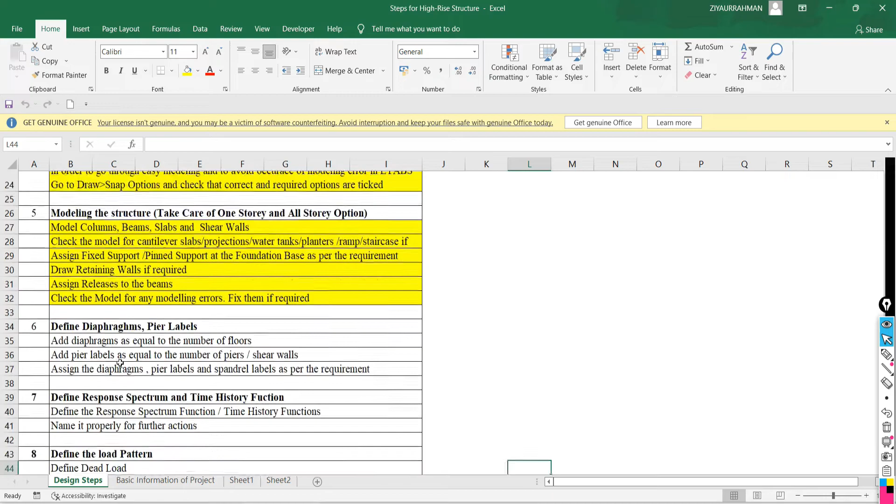So actually, all the things for the modeling of this structure we have completed. Now the next thing, we have completed the reading of all structural and architectural drawings, deciding the positions of your vertical elements, and setting up all the basic things in your ETABS software, like plan definition, story height definition, definition of material property, definition of sections, modeling of the column, modeling of the beam, modeling of shear wall.

Everything we have completed. Now the next thing we have to define: diaphragm, and we have to define the pier labels. So later on, all the discussion will be in respect of assigning earthquake load, and all the terms used in earthquake loading and earthquake consideration.

Whatever the later discussion will be, it is all associated with earthquake engineering and earthquake loading. So to understand all these things, it is very important to first clear all the basic concepts in respect of calculating the earthquake load. So let me take a simple example, so that through that example you can understand so many things about earthquake loading and earthquake load calculation.

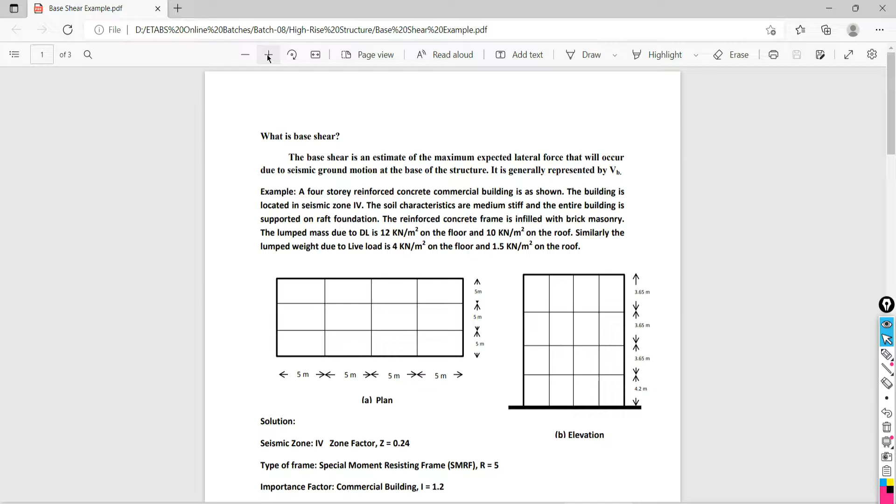So let me show you. Is it visible? So I'm going to stop the discussion for the completion of this project. In between, I'm going to take this example.

We have to understand so many things that we are going to use for the earthquake loading in the ETABS software also.

So the very first thing, what does base shear mean? That we need to understand. What does earthquake loading mean? That you need to understand. What does seismic event mean? That you need to understand.

Without having the basic knowledge, if you are going to learn advanced things, that is not the way of learning. Am I right?

Hello, Akhilesh sir. Yes, very true, yes yes. You need to start from the fundamentals.

Ryan, can you tell me what does base shear mean? No idea. That's a problem.

If you are going to learn anywhere, what will they tell you? Like, go to assign and do these things, and then your earthquake will be assigned. So that is not the way.

Digambar, tell me, what is base shear? Base shear is, sir, the maximum expected lateral force on the base of the structure. Exactly, very good.

That's the thing. That is why I'm asking this question, because it is very important to understand. Without having the knowledge and understanding of all these basic things, if you are going to look at advanced things, there will be no use of that learning. Got it? So first understand what earthquake means and what base shear value means.

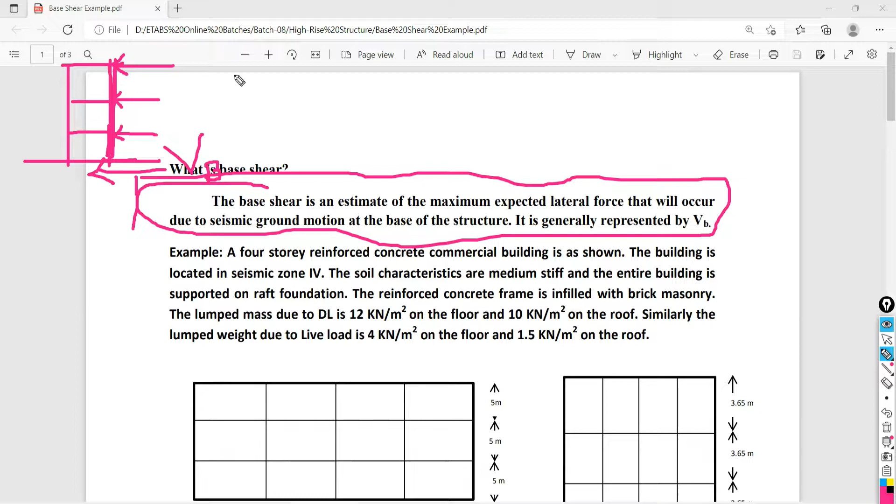This base shear value is going to be distributed over your height of structure at different floor levels. So basically, while making the calculation, later we will do this. Let me show you here - the distribution of force we are going to calculate at different floor levels.

At this different floor level, we are not going to calculate this lateral force separately. Actually the base shear value is here, and this distribution we are going to calculate only at the floor level. But your lateral distribution will not only be at this floor level, it may also be present at the intermediate level - at various intermediate points.

But my question is - why are we going to calculate this lateral force only at the floor level? Tell me.

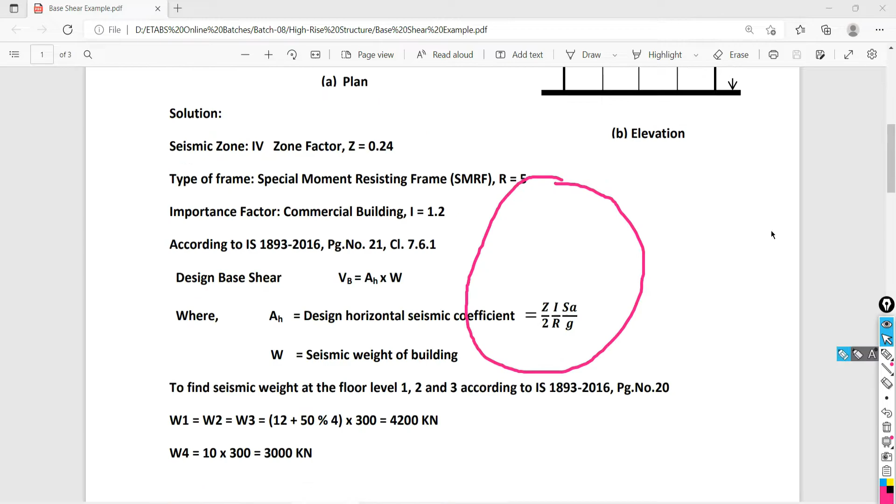One more thing - in the example we have, here we have to calculate the base shear value and its distribution over the height of your structure. So that's what we have done in this example - calculated the base shear value and its distribution over the different floor levels, and that is actually the practice.

But my question is why are we not calculating loads or forces at the intermediate level? It will also be present here, here, here, and here. So why are we calculating only at the floor level? Question.

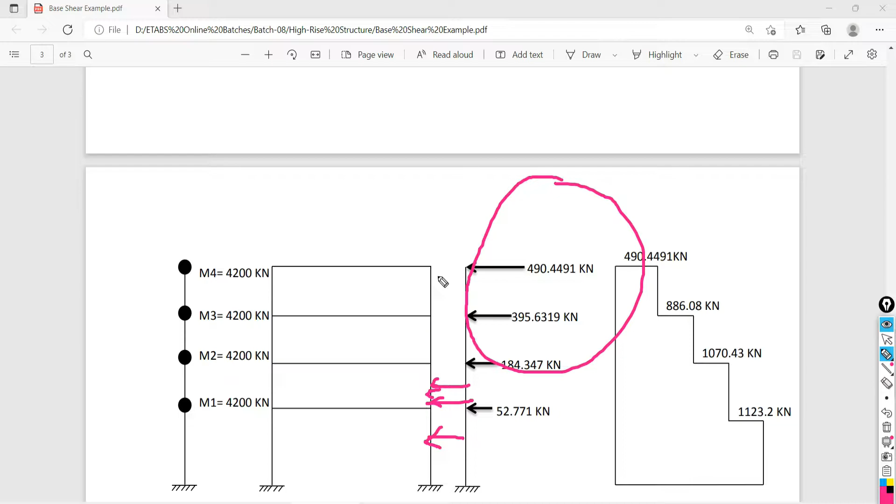Yes, because mass is concentrated at the floor levels.

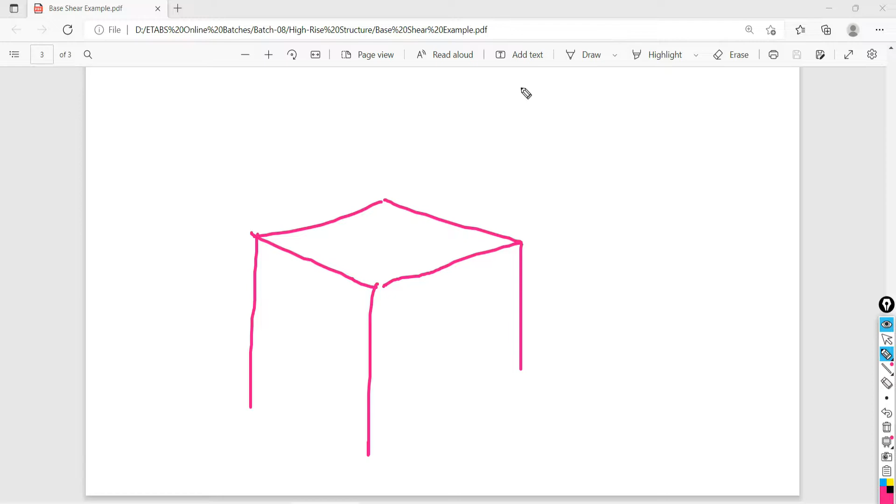Suppose any building is there like this. Those who are not getting it - okay, okay. So this is your structure.

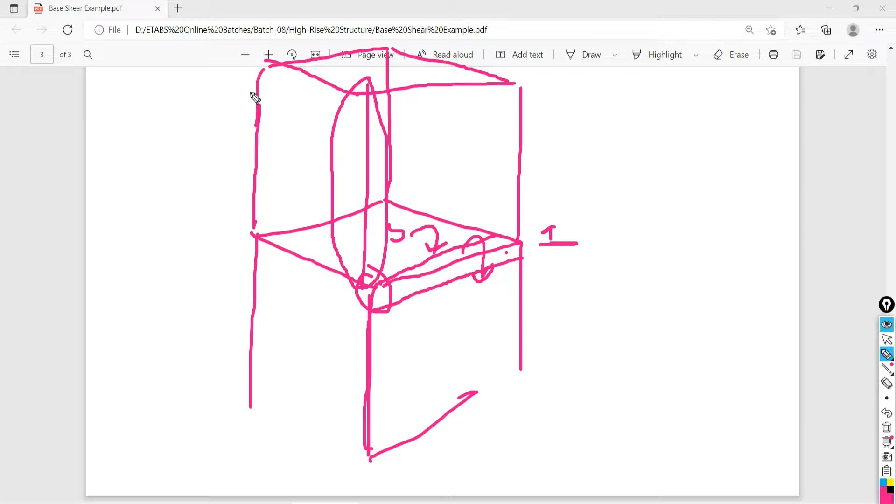So the beam will be at this floor level, slab will be at this floor level, the weight of the dead load or the weight of this column is going to be concentrated at this point. This column load is going to be concentrated at this level. So at this level the slab load, the weight of the beam, and the column load are all going to be concentrated from this level. So overall, at any particular floor, the maximum load is going to be concentrated through that floor. That's why the masses at different floors are very large - the weight of the total particular floor is going to be concentrated through that floor.

If I consider here, at this point only this column load is going to be concentrated, and that will be very minor, not needed to consider. That's why we are calculating the distribution of base shear only at different floor levels.

Second thing, at any particular point the lateral force or shear value will be directly proportional to acceleration, which is constant, multiplied by the seismic weight of that particular floor level. That's why we are calculating the distribution of lateral forces over the height of the structure only at the particular floor level.

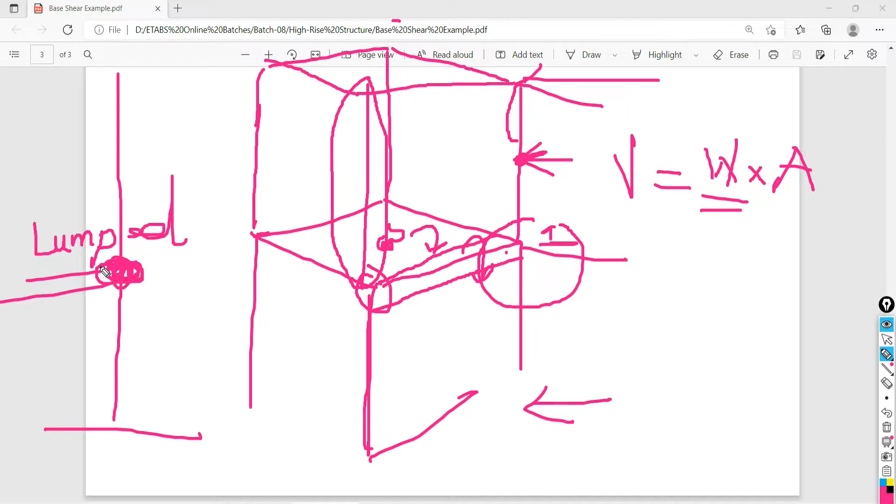And these masses - the mass of your slab, mass of your beam, mass of your column, and applied loads - all combined at any particular floor, we are going to call it lumped mass. Lumped masses.

So if you are going to deal with any problem manually, at any particular floor you have to calculate the lumped masses. That combines your dead load of that particular floor plus all the assigned load of that floor, giving you the total seismic weight of that floor. So the lumped mass at this floor, this floor, and this floor - with respect to these lumped masses, we are calculating the distribution of lateral forces.

Right, so in this example, actually all these things were done by the software also.

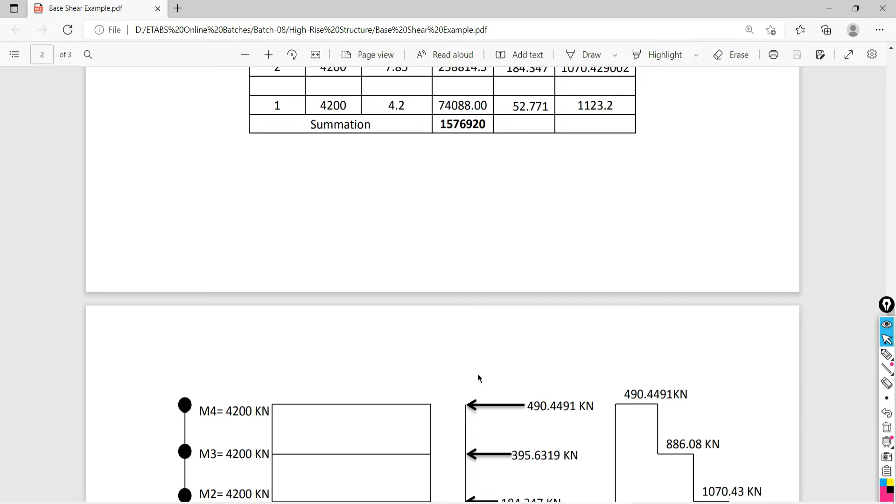So this is actually the thing, lateral forces we have to calculate. In this example we have to calculate the base shear value and its distribution over the height. That is only the question, but along with this we have to learn so many terms.

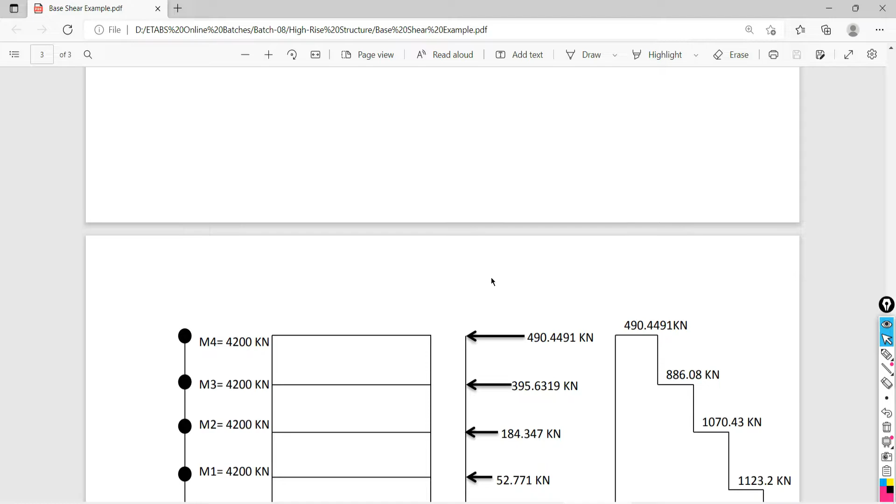Okay, so come back, very interesting. A 4-story reinforced concrete commercial building is there. What type of building is there? It is commercial, reinforced concrete. Based on utility - commercial, sir.

Forget our project that we are dealing with, forget that. The building is located in a seismic zone. Of course, our India is divided into 4 seismic zones based on the past data, meaning based on the intensity and magnitude of earthquake or seismic events of different cities and regions. Entire India is divided into 4 zones: zone 2, zone 3, zone 4, and zone 5.

Remember, it is starting from second, not first. So second, third, fourth, and fifth - four zones are there. So if you are in zone 2, there is a possibility of less intensity and magnitude of seismic event.

So here there are 4 seismic zones. Let me show you - seismic zone 3, seismic zone 2, seismic zone 4, and seismic zone 5. So Bhuj, and also the part of Latur, I think.

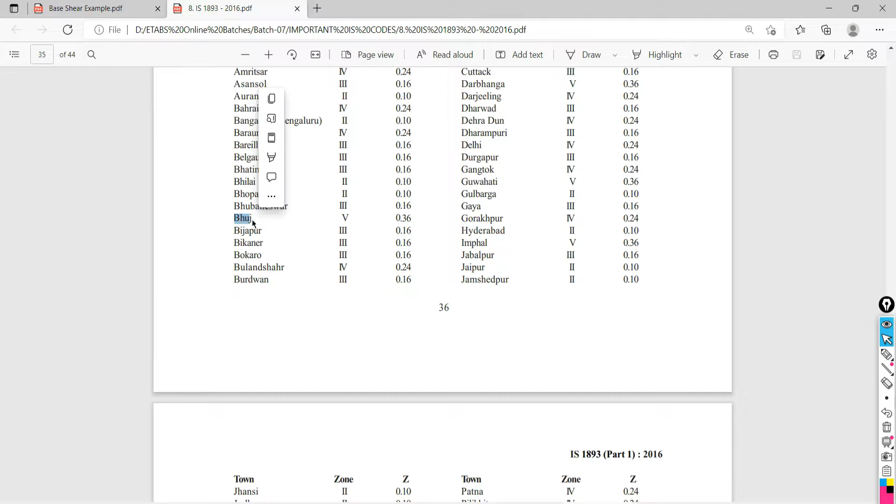Before that, if you look at IS 1893:2002, this was... I think it was in zone 3, 2 or 3 it was.

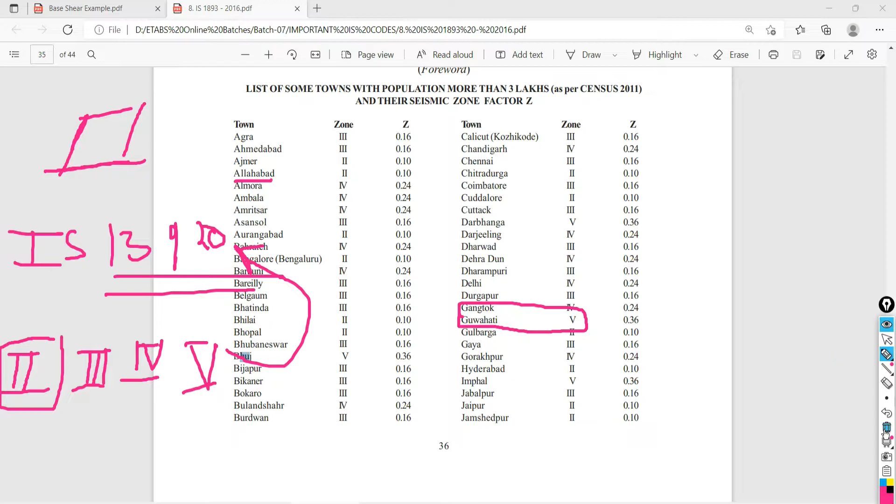That will be possible or not? Possible sir. Okay, so that's why, after the occurrence - okay, it is totally unpredictable. Seismic event is totally unpredictable, remember this thing. So one thing we learn from here is that your entire country is divided into four zones: seismic zones 2, 3, 4, and 5.

So your type of building is commercial building, reinforced concrete building. The building is located in seismic zone 4. The soil characteristics are medium stiff, and the entire building is supported on raft foundation. So as per IS 1893-2016, the type of soil is of three types: one is very stiff, then medium stiff, and loose soil or clay soil.

Okay, so I will let you know later. The entire building is supported on the raft foundation. The reinforced concrete frame is infilled with brick masonry, and the lumped masses due to dead load is 12 kilonewton per meter square on the floor level. What is it saying - it is G plus what?

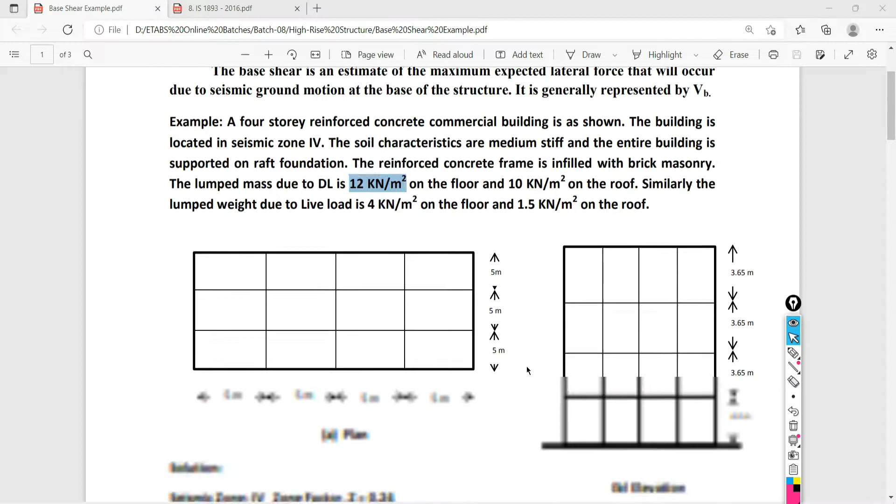G plus three floors - ground, first, second, and third - or totally if you are counting the floors, 1, 2, 3, 4 levels are there. So lumped masses due to dead load - due to dead load means what - 12 kilonewton on the floor level: 12 here, 12 here, and 12 here. Lumped masses due to dead load on the floor level, and 10 kilonewton on the roof level. Is it right or wrong?

Right, similarly roof is less. The lumped weight due to live load is 4 kilonewton on the floor level: here 4, here 4, and here 1.5. Getting or not? Getting, okay.

Remember this, now come down. So this is all the given data. Just come down - solution. The in-plan definition of this structure is: four bays along x direction 1, 2, 3, 4, and along y direction 3 bays, 1, 2, 3. Dimensions - distance between one bay is 5 meter in x and in y direction. Over the height, first slab is at a height of 4.2 meter, and 3.65, 3.65, 3.65 typical height is there.

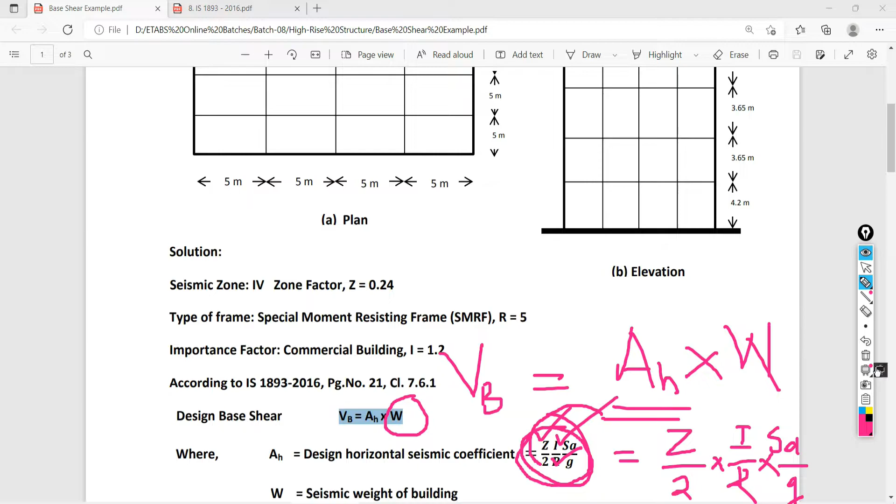Zone factor, what is it? Seismic zone is 4. What will the zone factor be? IS 1893 will tell you the zone factor value for seismic zone 4. Tell me, what is the value for seismic zone 4? 0.24, sir.

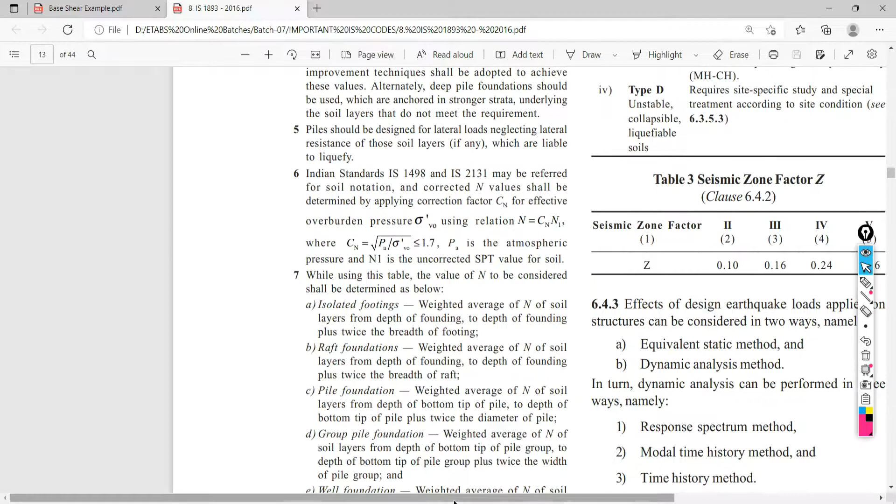0.24. Those who are doing their master's degree and want to work as a structural engineer, who are going to face interviews, they have to remember this: what are the different zones, how many zones there are, and their respective zone factor values. In the second zone the value is 0.1, in the third zone 0.16, in the fourth zone 0.24, and in the fifth zone the value will be 0.36. So that's what I'm going to put here. Zone factor value will be 0.24.

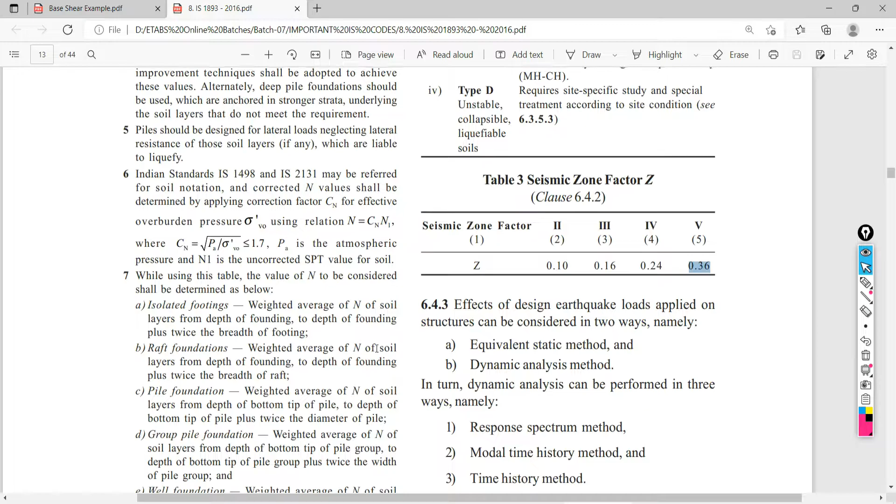Type of frame: there are two types of frames as suggested by the code. One is ordinary moment resisting frame. Another one is special moment resisting frame. What are those? Ordinary moment resisting frame and special moment resisting frame. So what is the difference between these two things?

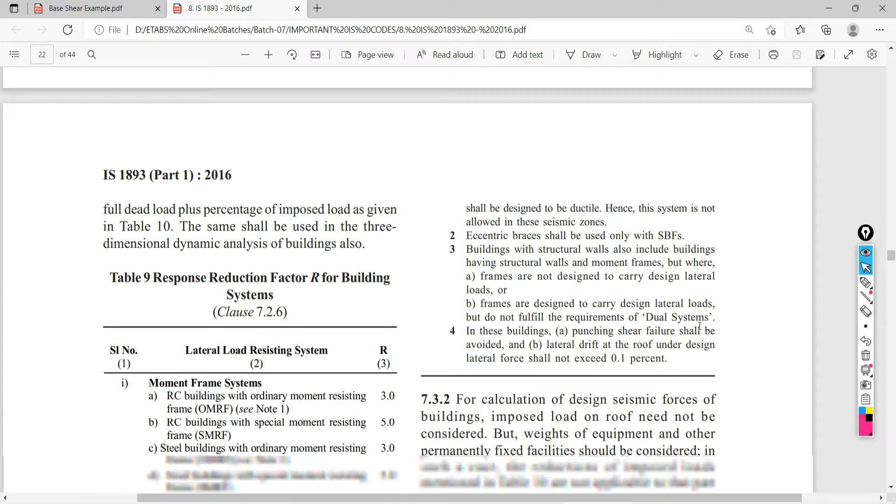Ordinary moment resisting frame and special moment resisting frame - very simple. If we are going to follow the ductile detailing as per IS 13920, at that time the building will be called a special moment resisting frame. If we are going to follow IS 13920, which is the code for ductile detailing, for your structure, then that structure is going to become a special moment resisting frame.

If you are not going to follow the ductile detailing, but you are going to consider earthquake loading, so it is going to become ordinary moment resisting frame. Is that all clear or not? Clear.

What about steel frames? There are steel frame buildings, ordinary and special, and braced frame system also there. Steel OBF structure - there is a different consideration for the steel structure. This is only about your RCC structure.

So my another question is: response reduction value we have to consider 3 for ordinary moment resisting frame, and for special moment resisting frame we are considering 5. So look at what will be the effect on your VB value, the base shear value.

Second, yes, anyone else? The probability is less.

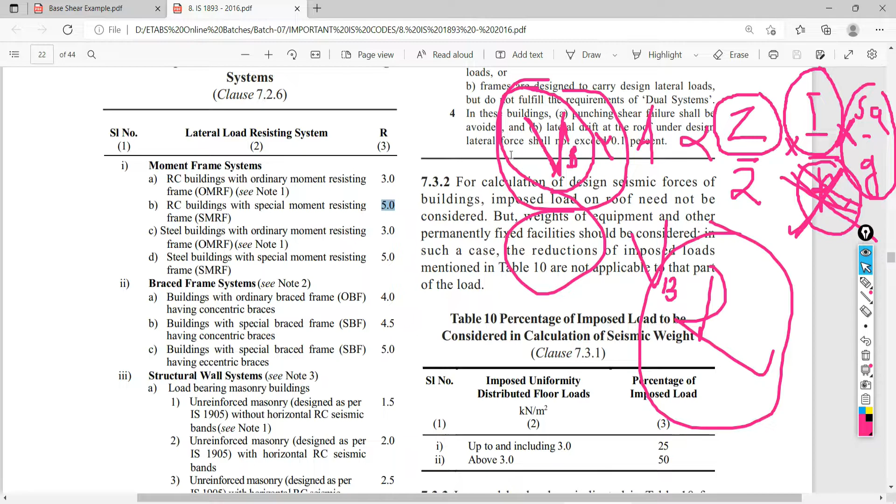Earthquake resistant design - we are going to make your structure earthquake resistant. If I remove this R value from the formula, the title of this code will change. It will become the criteria for earthquake proof design of your structure. Right, earthquake proof design of your structure.

So what does this mean? Here we are going to allow some kind of failure in your structure. We are not going to make our structure completely earthquake proof. So what will happen? We are making some provision for resisting the seismic event, but it will not become earthquake proof.

So there are three conditions. In the first case, when your structure is subjected to very less intensity of earthquake, or in other words, if the intensity of the earthquake is less than the resisting capacity of your structure, so what will happen?

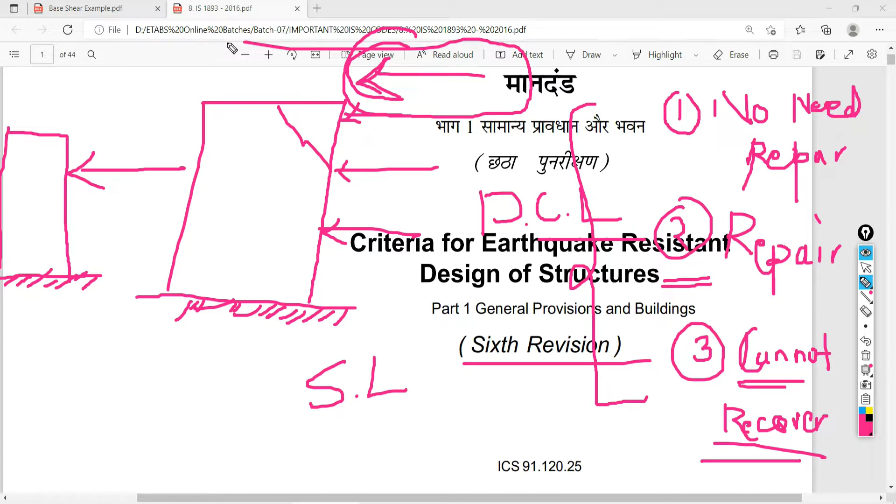As long as possible. We are going to make our structure earthquake resistant - not earthquake proof.

This is the answer for the first question, why we are considering this R value. My second question is why this differentiation is there - for ordinary it is 3, for special it is 5. As you told, the R value is actually the summation of all the over safeties.

The R value is a resultant value of your over strength factor multiplied by redundancy factor, multiplied by damping factor, multiplied by ductility factor. The product of all these over safeties will give you a response reduction factor.

Over strength factor is what? All the over strengths like your material over safety factors, partial safety factors, loading over safety factors, and all other kinds of over safeties come under the over strength factor. Redundancy factor - all the extra elements that you are considering in your structure come under the redundancy factor. And damping factor is what? Your structure is itself a damper.

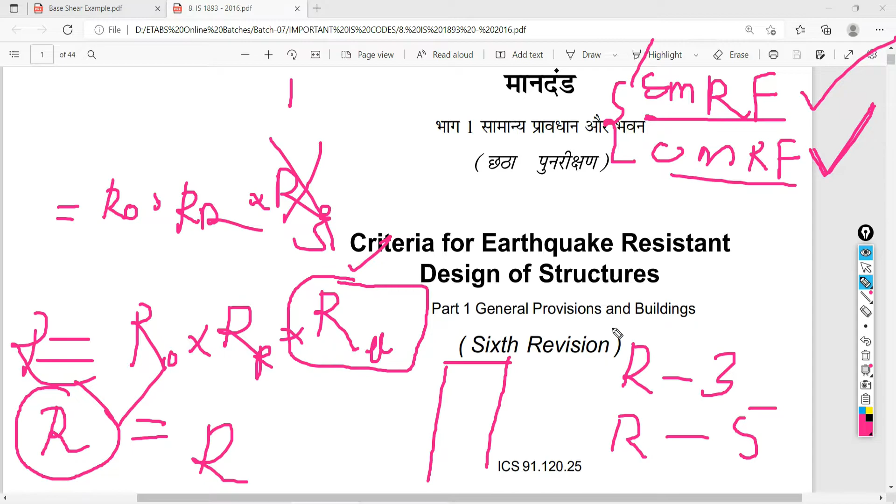Hello. Yes sir, come back, right.

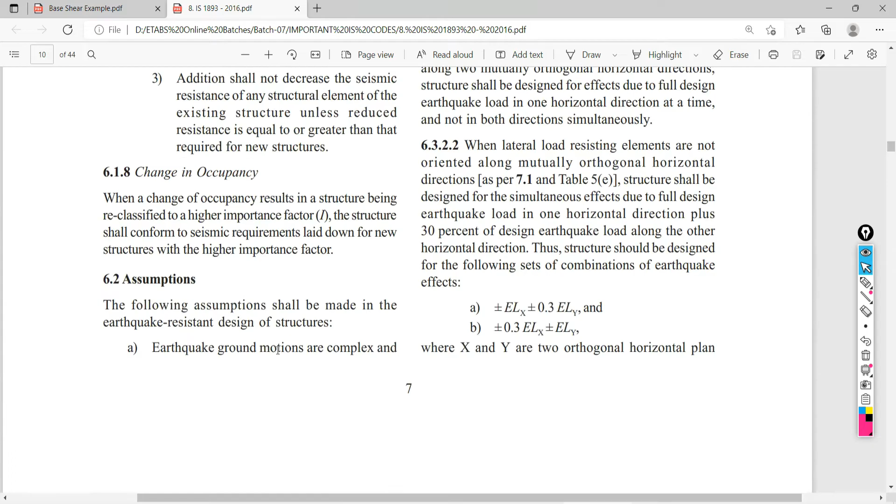So here for the special moment resisting frame, we have to consider the R value as 5. Importance factor, based on the importance of your structure, the importance factor you have to consider. So 3 types of structures are there: commercial and residential structure, public structure, and temporary structure. According to the type of structure and based on its utility and importance, the importance factor we have to choose.

Importance factor for important service and community buildings or structures, like government buildings, school buildings, and any kind of public structure which needs more importance, we need to consider 1.5.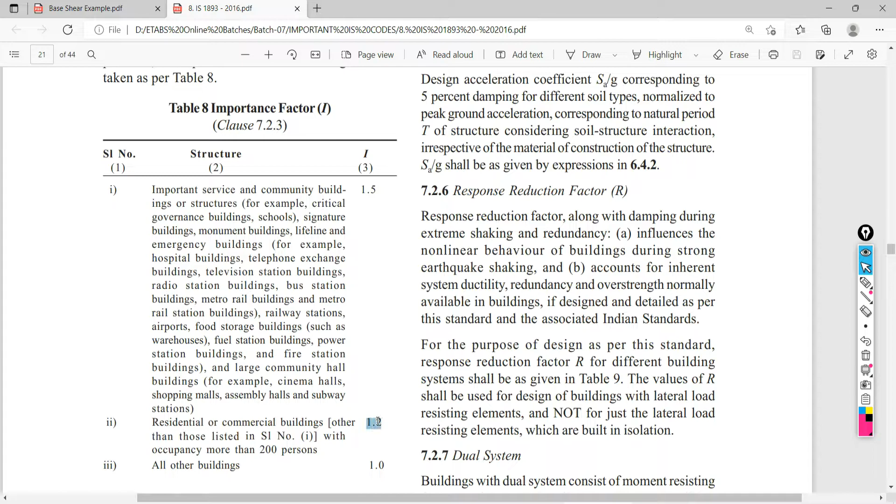For residential commercial building we have to consider 1.2. For all other buildings, which include temporary structures, what importance factor do you have to consider?

1. Tell me, in our problem, what type of building is it? Commercial building, sir. So importance factor will be what?

1.5 sir. Sorry? 1.2 sir. 1.2, don't do the mistake. Hello. Akhilesh sir, are you there or not?

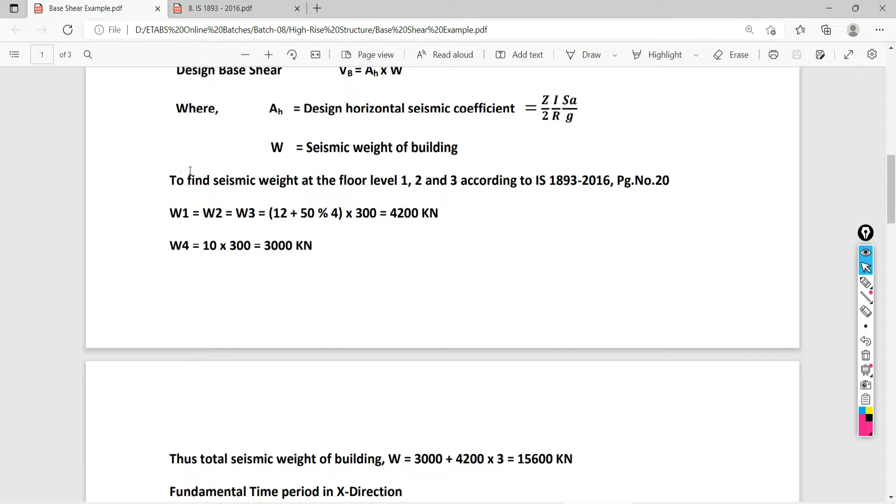Yes sir, okay. Next, to find the seismic weight at the floor level, seismic weight, not just weight. Why am I not going to call it weight? Because weight will include only the dead load. But here there will be consideration of live load also, in the calculation of the lumped masses.

So actually we need to calculate the lumped masses at different floor levels. So at this particular floor, if I need to calculate the total load, I have to add the dead load plus live load.

At this particular floor, how much dead load is there? 12, sir. 12. And live load, how much? Lumped weight due to live load at the floor level is 4. Total how much will it become? 16. Is it right? No, it is wrong.

Actually, for dead load there is no clause, 100% you have to consider it. But there is some reduction as suggested by your code for live load consideration. Come to your IS code and let's try to understand what reduction is possible. Okay, is it visible?

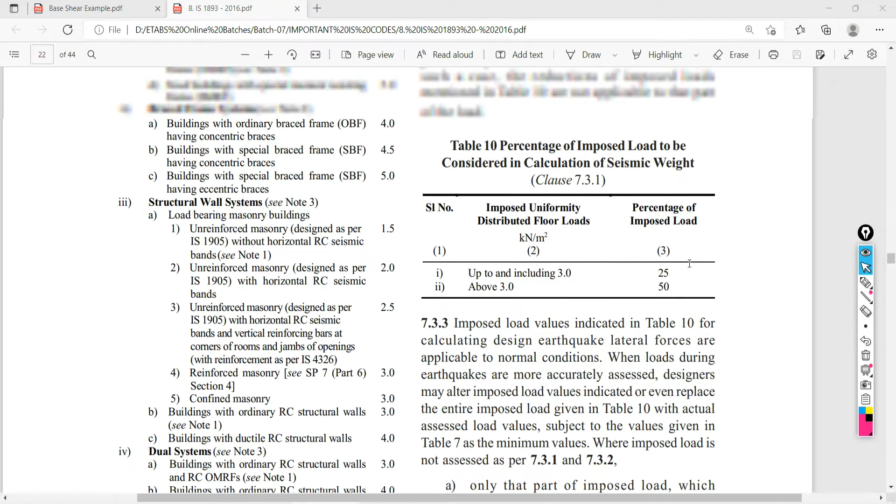Yes sir. Read this clause. For the calculation of design seismic forces of the building, that is base shear value, imposed load means your live load on roof. Roof means your terrace need not be considered.

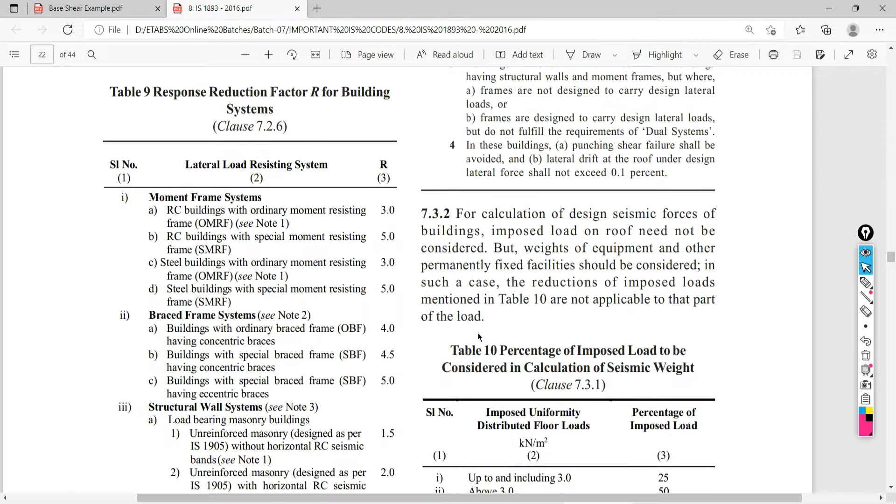Now table 10, what is it? There's some reduction for your live load while calculating the seismic weight. So if your live load on the floor level, excluding your terrace floor, because at the roof level you don't need to consider the live load, you can neglect that.

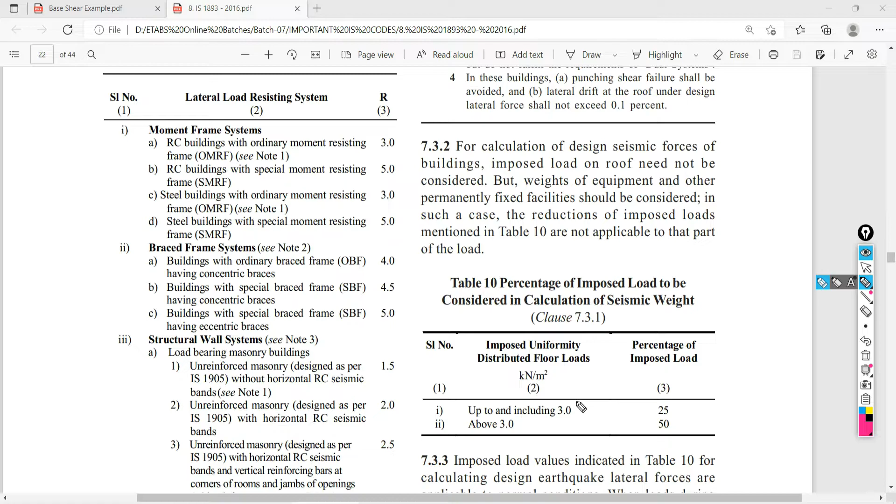But for the other lower floors, if your live load is less than or up to 3 kilonewton per meter square...

Yes sir. So how much do you have to consider? 25% sir. 75% you have to neglect, and only 25% you have to consider.

If your live load is more than 3 kilonewton, how much do you have to consider? 50% sir. 50% you have to leave.

Now here, the 12 dead load - I said this is not for discussion. So here I am going to consider 12 plus what the code is saying: if it is more than 3 kilonewton per meter square, then you have to consider only 50%, and if it is up to and less than 3, only 25% you have to consider.

Now it's 4 kilonewton. How much do we need to consider? 50%. So 50% of 4 kilonewton will become how much? 2 kilonewton. So overall it will become 12 plus 2 equals 14. So at this particular floor, lumped weight will become 14 kilonewton per meter square. Remember this - at this level, same 12 and 4 will become 14 kilonewton per meter square.

At this level, it is again 14 kilonewton per meter square. Now at this level, lumped mass due to dead load is 12 on the floor level and 10 kilonewton per meter square on the roof. So here dead load is 10, plus similarly live load - the lumped weight due to live load is 4 kilonewton for all the lower floors and 1.5 at the roof level.

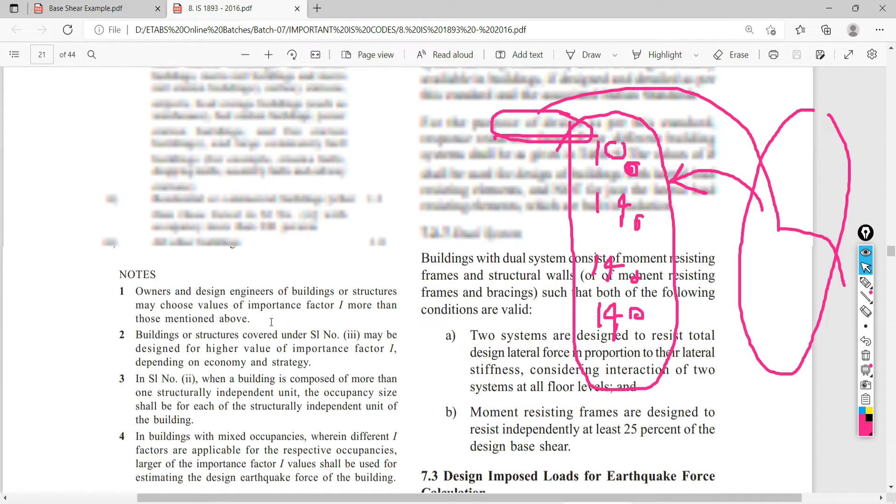1.5 है सर पब्लिक के लिए। अगर ऐसा सिचुएशन आ जाता है, आपका स्ट्रक्चर कमर्शियल प्लस पब्लिक हो जाता है, तो आप क्या लेंगे वहां पर? 1.5 सर, बिकॉज योर VB इज डायरेक्टली प्रोपोर्शनल टू योर I वैल्यू। मीन्स अगर आप I को कम करते हो, मीन्स यू आर गोइंग टू अंडर एस्टिमेट दी VB कैलकुलेशन।

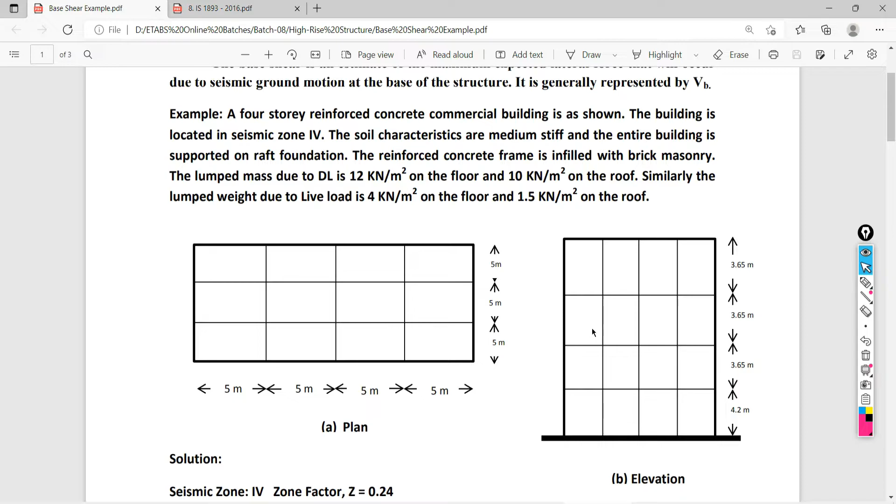इस केस में ये चीजें ध्यान रखना है, जितनी भी सिचुएशंस आएंगे यू हैव टू कंसिडर द क्रिटिकल वन। अच्छा, तो हम लोग यहाँ पर पहुंचे थे। एट W मीन्स एट दिस लेवल it will become 12 plus 50% of this 4, it will become 14, right? सही कैलकुलेशन है ये?

It is in kilonewton per meter square multiplied by in plan area. In plan area is floor area. Here how many bays are in x direction? 4 means 20. Here it is 3, so 15. 20 by 15, how much it will become? 300 square. So this 300 in plan area, इसको मल्टीप्लाई करेंगे बिकॉज दिस इज किलोन्यूटन पर मीटर स्क्वायर मल्टीप्लाइड बाय मीटर स्क्वायर, सो मीटर स्क्वायर गेट कैंसल, किलोन्यूटन weight you will get.

क्लियर सर। ओके, नाउ अभी फर्स्ट सेकंड एंड थर्ड, फोर्थ भी ले सकता हूं मैं यहाँ पर। W4 सेम वेट आएगा।

टेरेस लेवल, नो सर, वहाँ तो लेने की जरूरत नहीं है, सिर्फ 10 है, मल्टीप्लाइड बाय 300 कितना हो जाएगा ये? 3000। क्लियर?

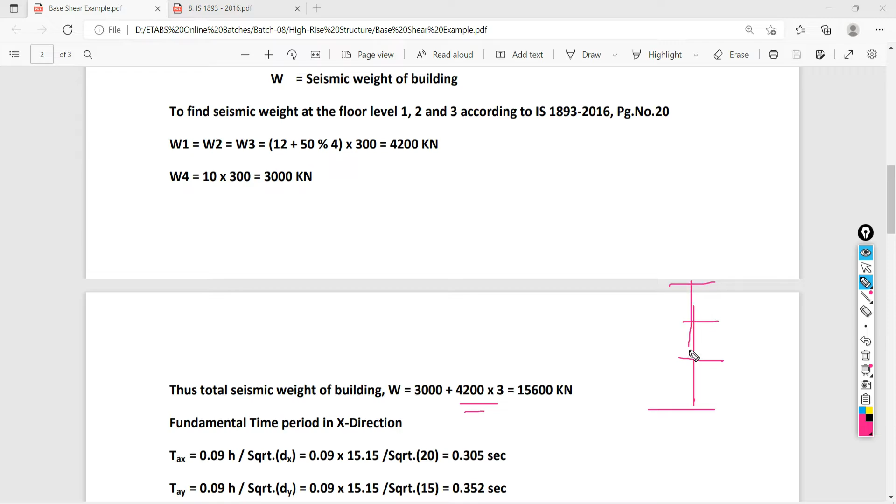टोटल सिस्मिक वेट कैसे निकलेगा? 4200 multiplied by 3 times, 3 levels are there, 1 2 3, यस प्लस आपका टेरेस आ जाएगा 3000 प्लस 4200 मल्टीप्लाइड बाय 3 टाइम्स, टोटल वेट हाउ मच? 15,600। 15,600 is total seismic weight of your structure.

नाउ अभी हम लोगों के पास क्या क्या वैल्यू आ गई? Z है हमारे पास, I है हमारे पास, R वैल्यू है हमारे पास, बट एक्सेलरेशन वैल्यू वी आर नॉट हैविंग as SA by G. How you can calculate this SA by G?

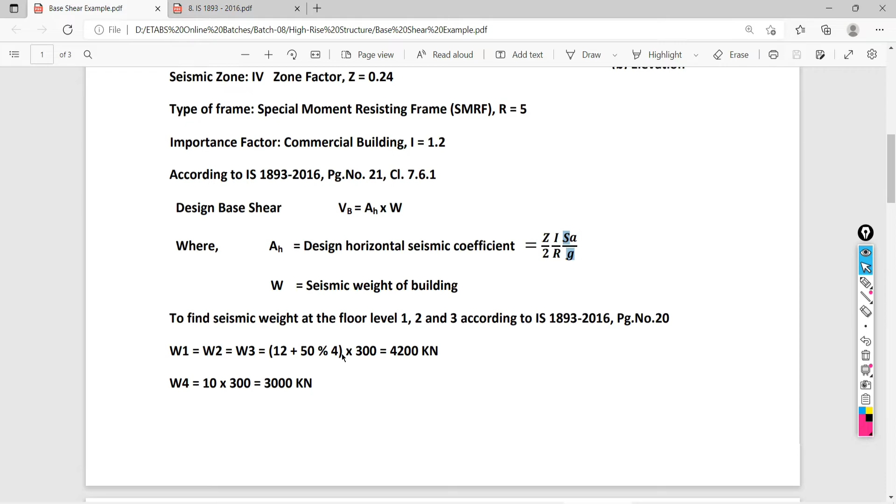Okay, so your SA by G value is depends on your time period of your structure, under the seismic event. Time period, and the basic formula for the calculation of time period.

Okay, time period is what? The number of, the time required to complete the one oscillation. Period and frequency you might have studied in your 11th and 12th.

So time required to complete the one oscillation called as fundamental time period. So that's the same thing is here. The time required to complete the one oscillation for a building called as a fundamental time period. So how to calculate the fundamental time period? The formula has given by your IS code IS 1893/2016.

Yeah, see, you all are with me? Your SA by G value is depends on fundamental time period of your structure, and time period of your structure is depends on what type of the soil is there to which your structure is subjected, your structure is constructed. आपका टाइम पीरियड डिपेंड करता है द टाइप ऑफ द सॉइल ओवर विच योर स्ट्रक्चर इज बिल्ट।

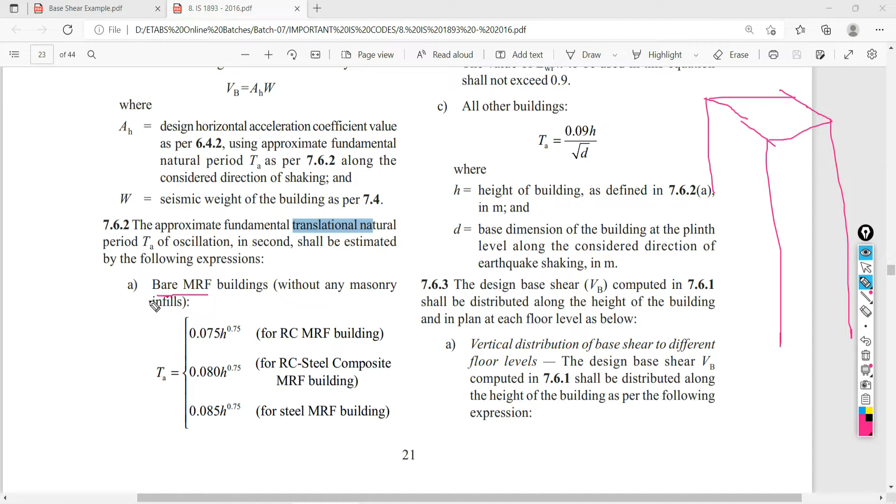Building with RC structural wall means in a structure there is only the provision of structure wall, shear wall. So for that time period you have to calculate using this formula. And for all other buildings means the structure which is having the infilled masonry wall. So अभी हम लोग इसके ऊपर तो फोकस नहीं करेंगे।

Second one we have to focus on first and third: the structure without of infilled masonry wall, the structure with infilled masonry wall. आप मुझको बताइए, एक स्ट्रक्चर मैं इस तरीके से बिल्ड करता हूं...

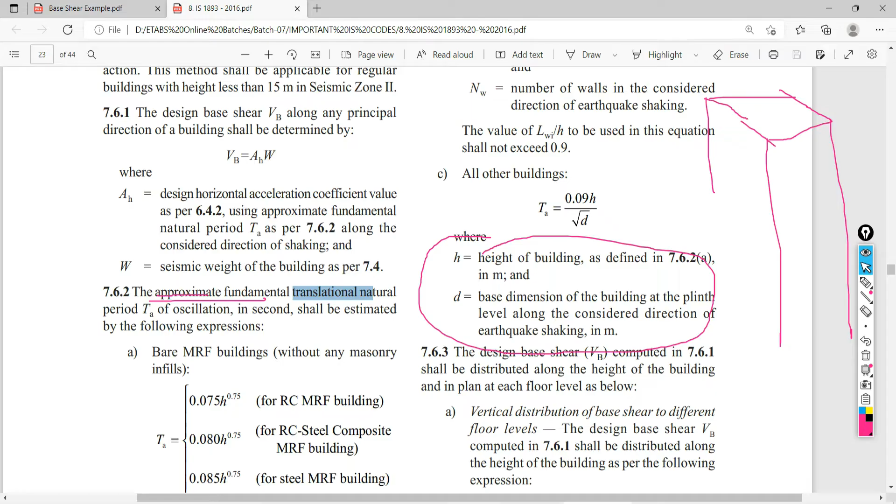which is having the infilled masonry wall. All the other parameters are same, सारी चीजें, डायमेंशन, साइजेस, लोडिंग, everything is same. Only the difference is what? With these two structures, infilled masonry wall, infilled walls.

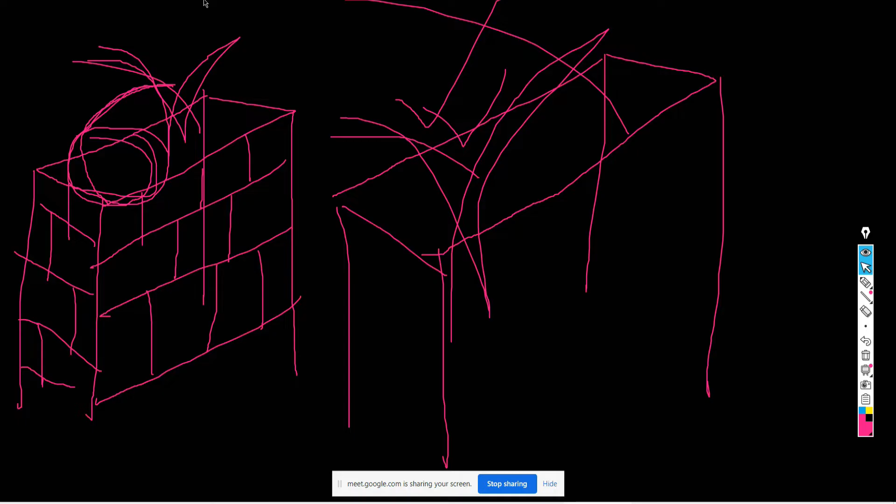Let me show you. Okay, clear these all, just come down. So bare moment resisting frame without infilled masonry wall. Okay, so if RCC building is there, if steel structure is there, if composite structure is there, for these formulas are there. It is called this formula you can use as per your type of structure. Very simple, nothing is there. Only this H you have to consider.

H here it is given height of building, but I am not going to call it as height of building. I am going to call it as seismic height. Why I am going to call it as seismic height? You will come, you will understand this later. Okay, here I am not going to call it as height, I am going to call it as seismic height. Okay, I will let you know.

Wait, second, for all other buildings, means the structure which is having the infilled masonry wall, so for that we have to use this formula. 0.09H is there, which is normal height, but I am going to call it as seismic height. And this is what direction, means dimension of your overall dimension of your structure at the plinth level - base dimension of the building at the plinth level in the considered direction of loading. Agar aapko x mein earthquake consider karna hai toh yeh consider karna padega, yeh dimension lena hai. Agar aapko y mein loading consider karna hai toh yeh dimension lena hoga. Is that all okay?

Correct, yes sir, hello. Yes, yes sir. Okay, so why I'm calling it as seismic height?

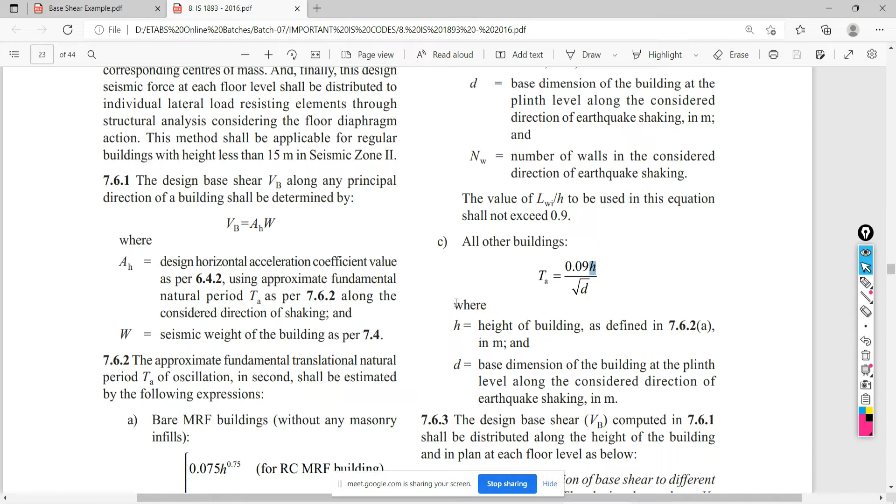First, let's try to understand this seismic height. So because there is some concept behind deciding the height of structure, that's why I'm going to call it as seismic height. If this concept is not there, then I can call it as simply height. But yeah, there is a concept - it is variable, it will change based on your situation. That's why I'm calling it as seismic height.

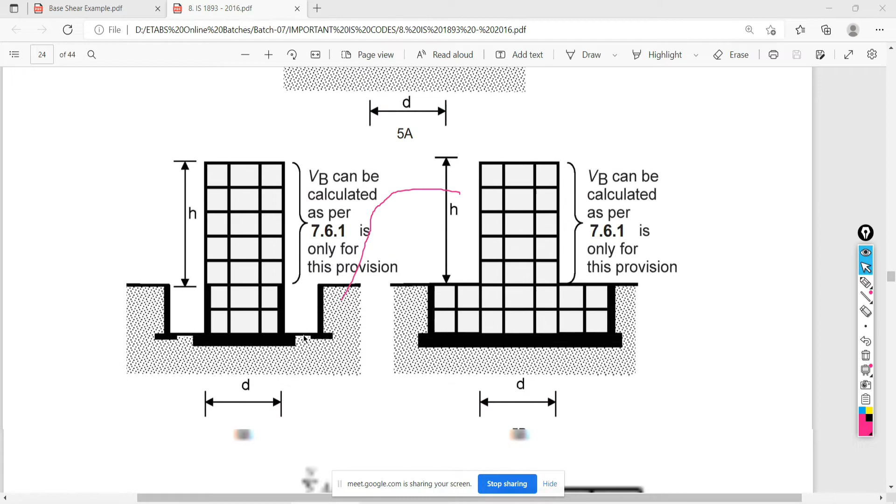Kya situation hai? Okay, so if your structure is of this kind, then you have to consider this total height. What difference is there among these all figures? Try to understand, if the structure which is having the basement, hello, yes sir, which is having the - kya difference hai yeh dono figure mein, yeh first and second.

So try to understand, if your structure is having the basement, but what, this is your property, this area is what - it is suppose your property, and you are going to keep this excavated area as means blank even after the completion of the work. Hello.

Your retaining wall is away from the outer line and peripheral line of your structure. So here you have done excavation, and you are not going to refill this area with soil mass. If there is no refill, there will be no lateral force or lateral pressure on this wall. So without a base wall or basement wall, you can build this structure.

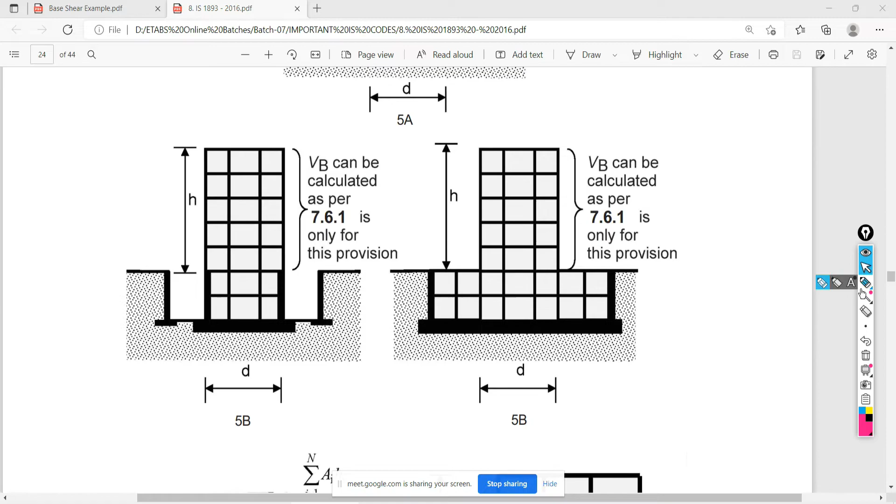In this situation, we have to consider the overall height from this point to this point. In the second case, here this is not your property, it is a temporary retaining wall. After completion of work, you have to refill this area.

This earth mass will apply pressure to this wall. If you consider a general brick wall here, that will not be capable of withstanding this lateral pressure of the earth mass. Am I right or wrong, Ashok sir?

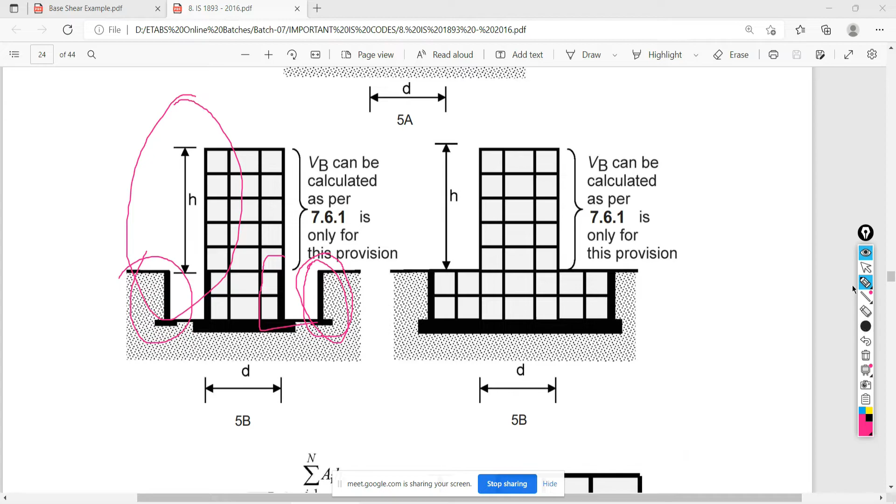And then in this situation we have to consider this H as the height of your structure. All these situations have been given to you, and accordingly we have to decide the height of your structure. I think you would have understood.

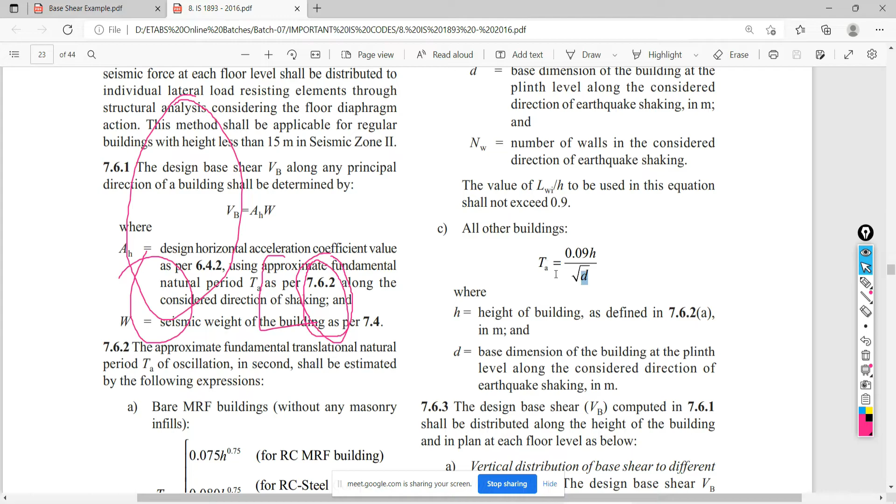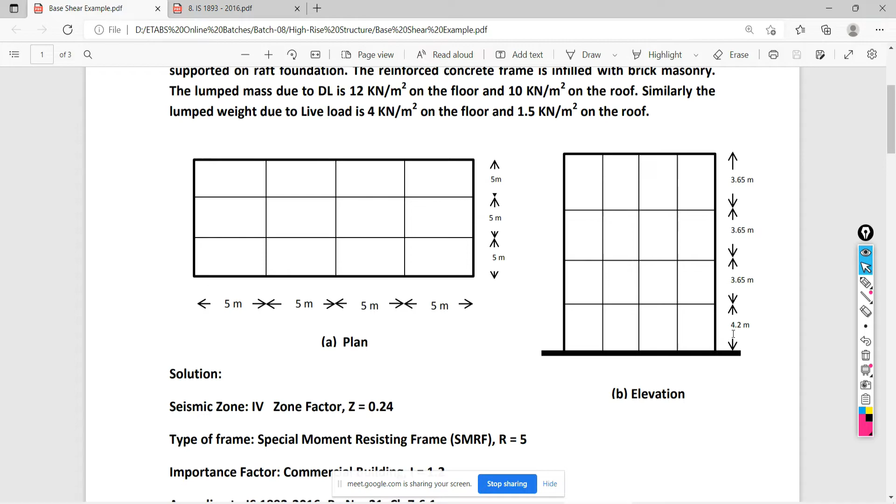So here, what is the time period formula? 0.09h. So here, in the normal situation, we have to consider total height. Total height is how much? 4.2 plus 3.65 plus 3.65 plus 3.65, not much complication here. So directly we add all these values: 4.2, 3.65, 3.65, 3.65. If you add all these values, you get 15.15. You can check it.

Okay, you can check it, square root of consider direction. If we are calculating in the x direction, how much dimension do we take? 20. Okay, so we are getting the value 0.305 seconds.

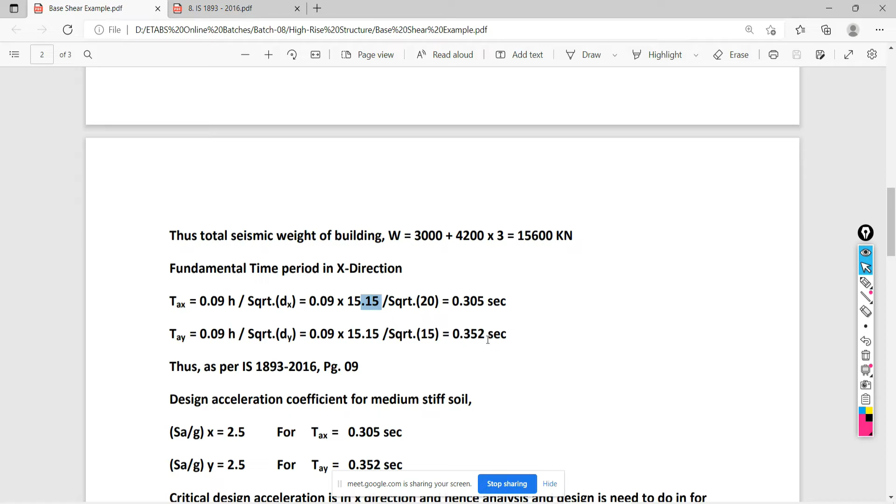Ta means in the y direction, the same formula will be there: 0.09h over square root of dimension, 15.15 for the y direction. We get this 0.352. Why am I using this formula? Because in the question, it is given that it is infilled with brick masonry. That's why I'm taking this.

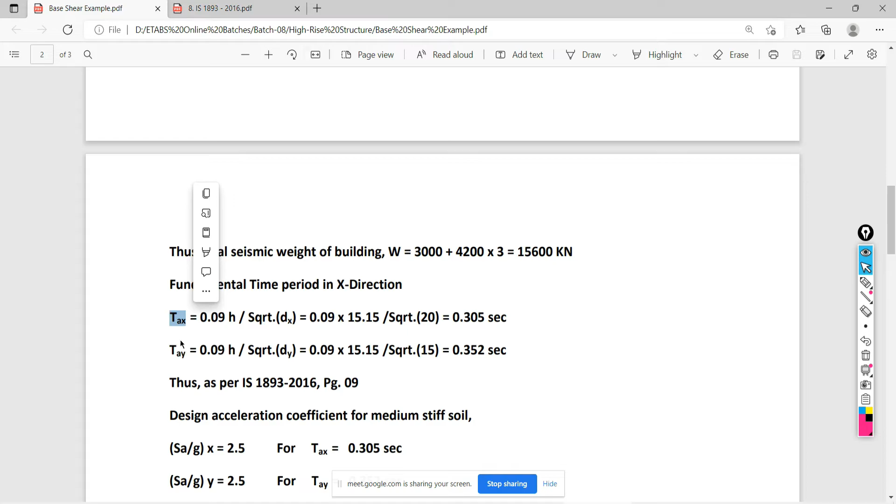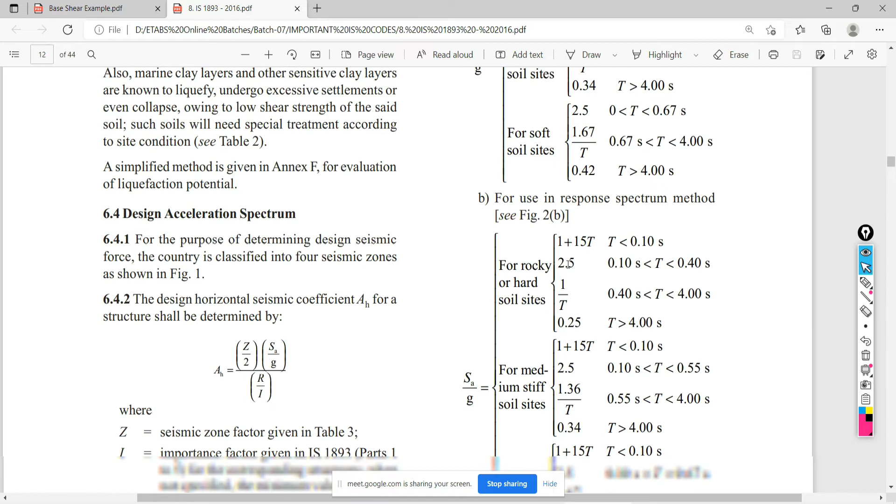Actually, our objective is not to calculate this Ta time period. Our objective is to calculate Sa/g value in both directions, but that depends on your time period. So come back to your IS code again and look at this. If you are calculating by the equivalent static method, you have to use this; if by the response spectrum method, you have to go with this. But I will let you know the different methods later. Right now, the example we are solving is as per the equivalent static method.

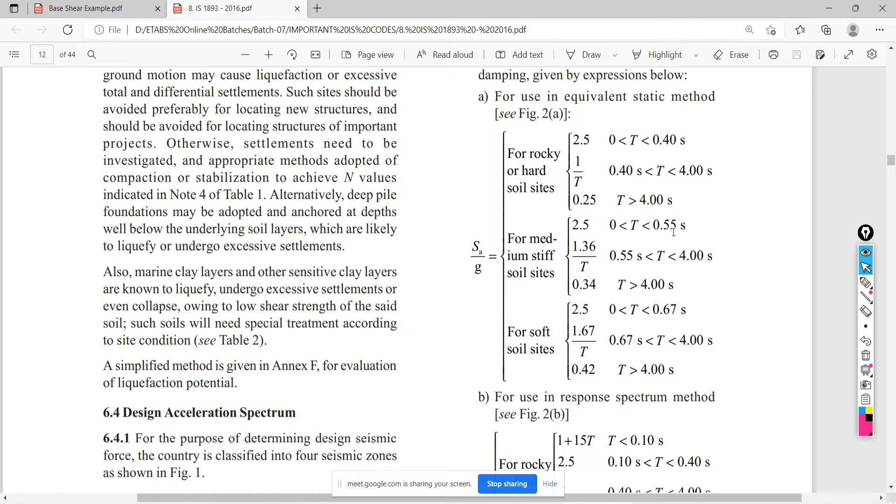But for the equivalent static method, what type of soil do we have for rocky soil or medium stiff soil? Medium stiff. So for medium stiff, the Sa/g value: for x direction, if time period is between 0 to 0.55, it is this. For the y direction also, 0 to 0.55. So for both cases, what does your time period become? 2.5. So we can consider either direction, and that is what we are going to consider, 2.5.

Okay, now considering the critical direction, design acceleration in x direction, and hence analysis and design needs to be done in this direction. In the next direction, we are going to do the calculation.

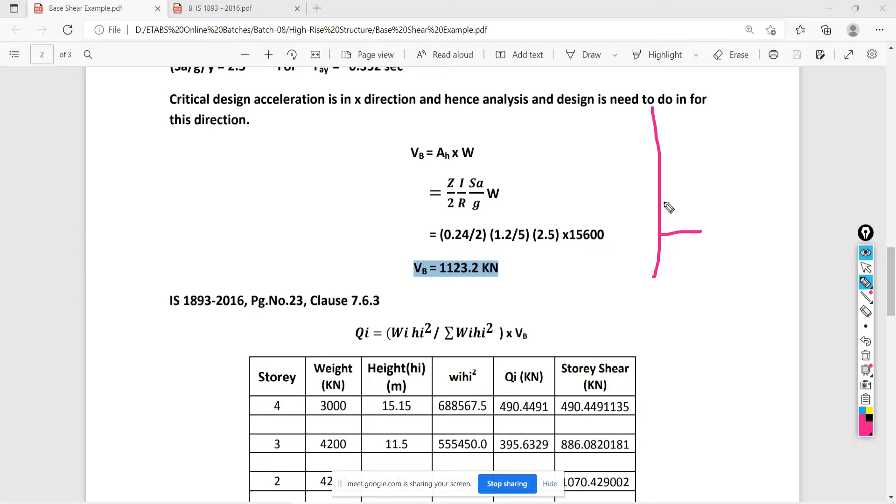TAX is 0.305. Actually we are taking 2.5, sir. For TAY, it is 0.352 seconds. So that is the critical one.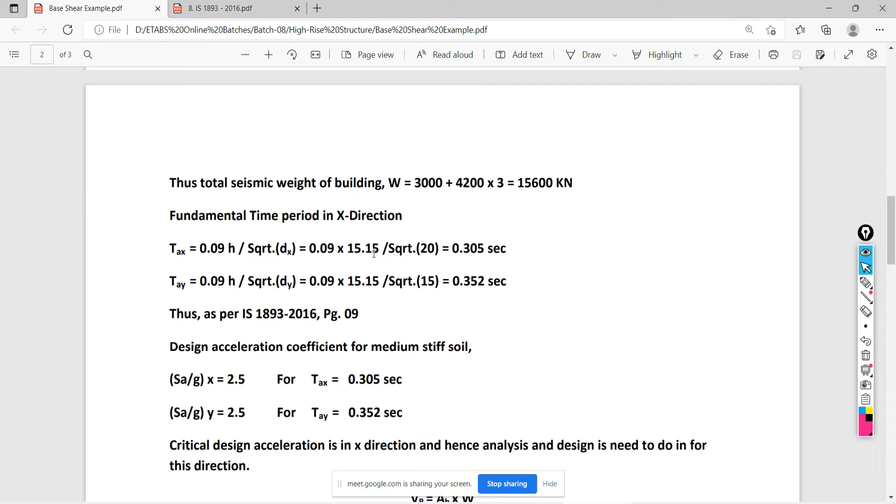Come to this table, you will come to know. At fourth floor, total weight is what? Lumped mass total 1000 kilonewton... 3000. Okay, at terrace total height from the base is 15.15. Correct.

Weight multiplied by HI square, where HI means this particular floor height - this much you are getting. For the third floor we are moving from top to down. For the third floor, 4200, height will be reduced to 11.5, multiplied with the square of this HI, you will get this. With all this we are taking the summation of all these values to get this value. Right or wrong? Very simple.

QI, how do you calculate QI? This particular value divided by this particular value - take the calculator in your hand, divide this value by the total summation 157, then multiply by VB, 1123.2.

Check it, whether right or wrong. Show me just above, I want to see the VB value. VB is 1123.2. Is it right or wrong?

Check it - this value divided by the total value multiplied by VB, you will get this. This value divided by the total value multiplied by VB 1123.2, you will get this value.

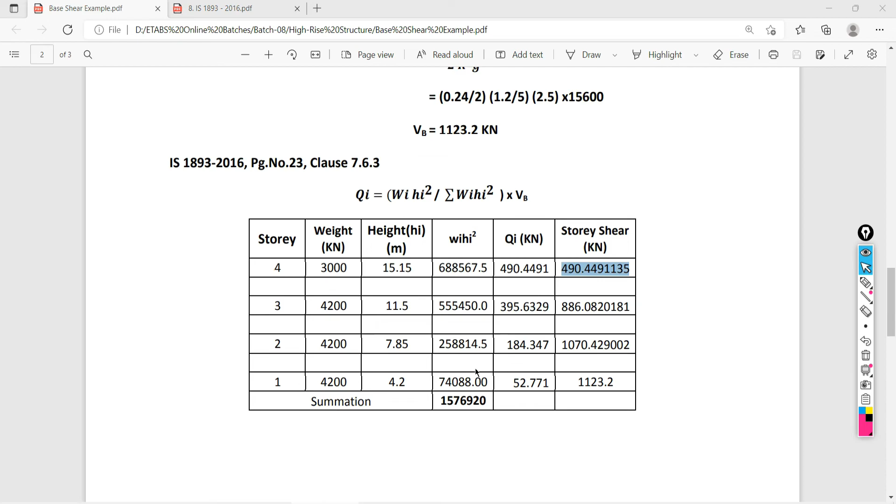This is 3000, not 4200. Correct, okay, this is 3000. Later on, everything is the same.

This is the idealized diagram showing the lumped masses. This is your frame, and this is your lateral forces over the height, and this is your base shear value. Getting it or not? Is that all clear? Is there any doubt or question?

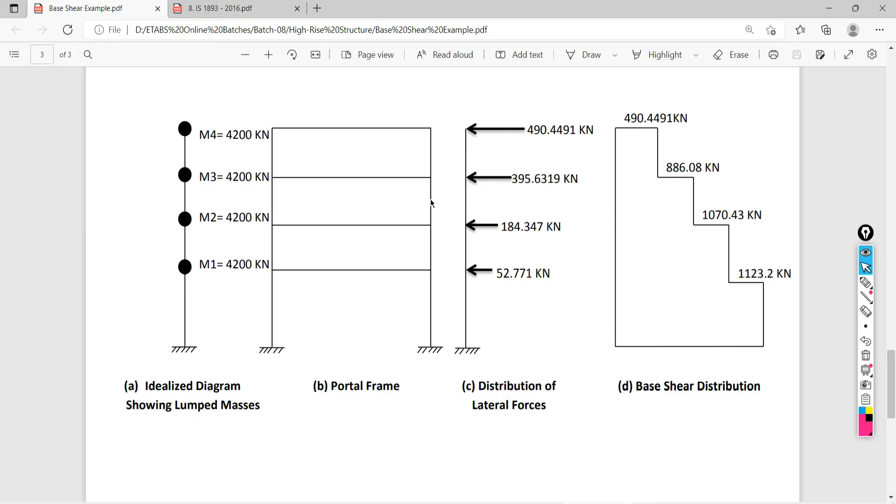What does the diaphragm do? The consideration is that if lateral forces are going to act on the floor level, do you understand where the lateral force will act? Where the lumped mass is, at the floor level, right?

So your lateral force doesn't have any path to be transferred from the structure. We know this is the lateral force, but the basic concept for transfer of load is in the gravitational direction - from slab to column, column to beam, slab to beam, beam to column, column to foundation. Am I right? But here the load is going to act in the lateral direction. This is not going in a vertical path. So what will you do now?

So the concept of floor diaphragm comes into the picture, where the floor diaphragm will make all the different elements of a particular floor behave as a unit element. All the different floor slabs which are separate - if you assign or consider the floor diaphragm, it will make all these different slabs into a unit element, like the lumped mass.

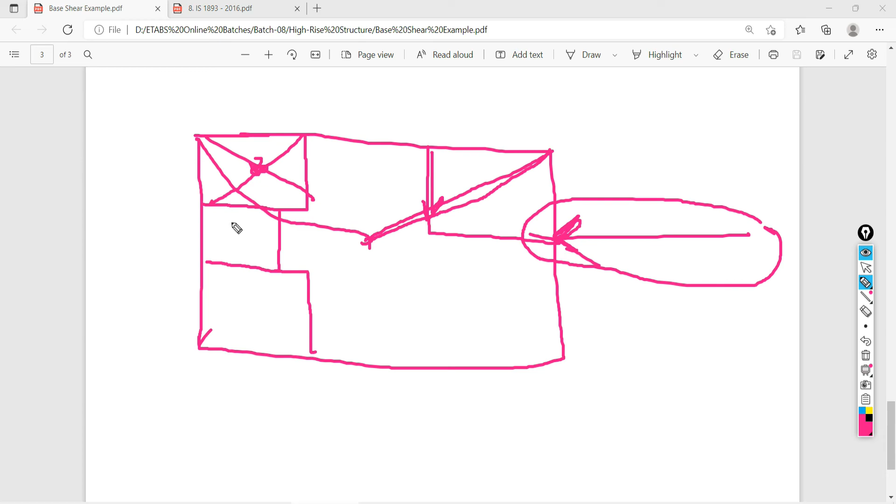No, that's another thing. What it will do is make it a unit element, and it's going to create a center of mass point. Actually what happens here is the center of mass of this slab gets generated here.